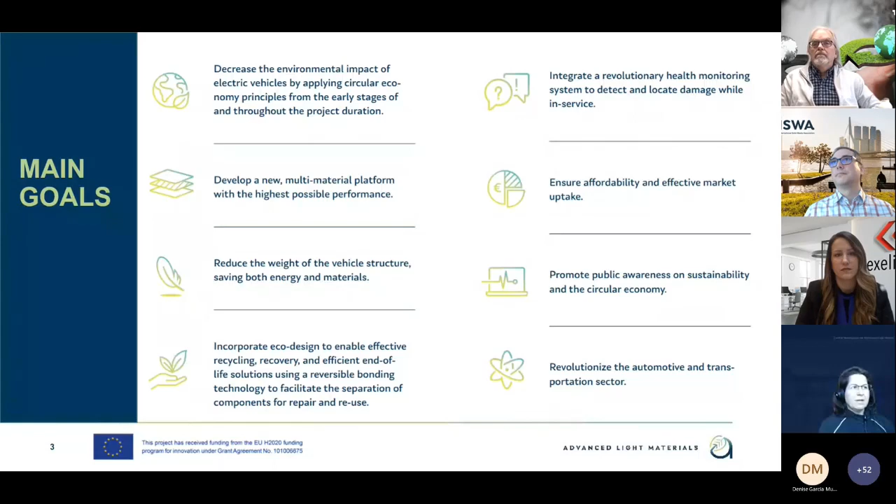As I mentioned before, we are 9 partners composed of 5 industries, some big ones like Ford or ArcelorMittal or BATZ, some SMEs, the case of Rescoll and Innerspec, 3 RTOs, CTAG, Fraunhofer ITWM, and TNO, and 1 international association, ISWA.

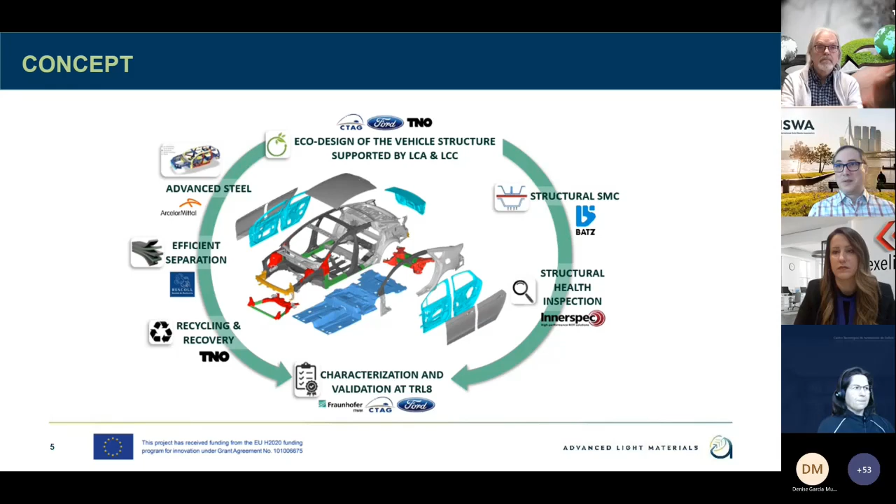First of all, the first step was to adapt the structure of an ICE model, an internal combustion engine model, to a BEV model, a battery electric vehicle model. So this was the first step.

When we had the first version of this electric model, we started the optimization of design. There are several key points we have mentioned here. The first one is that we have to choose the best material for the best location. This is really important because sometimes the materials are really high performant, but we are not putting them in the right way. So it seems very simple, but it's not the case. It's really important to choose the best material for the best location.

The fact of using new high-performance materials allows us to integrate functions. That means that in some cases, at the first point we had 2, 3, 4, or 5 different components, and now we are able to integrate them into one only component. This is thanks to the typology of the materials, but also thanks to the redesign of these parts.

And the last point is really important: when we are designing this new structure, we are not only thinking to meet the requirements for the function of the car or for the life of the car. We are also thinking what is the solution for the end of life. So when we are designing, we are thinking of the use, but also thinking of the future.

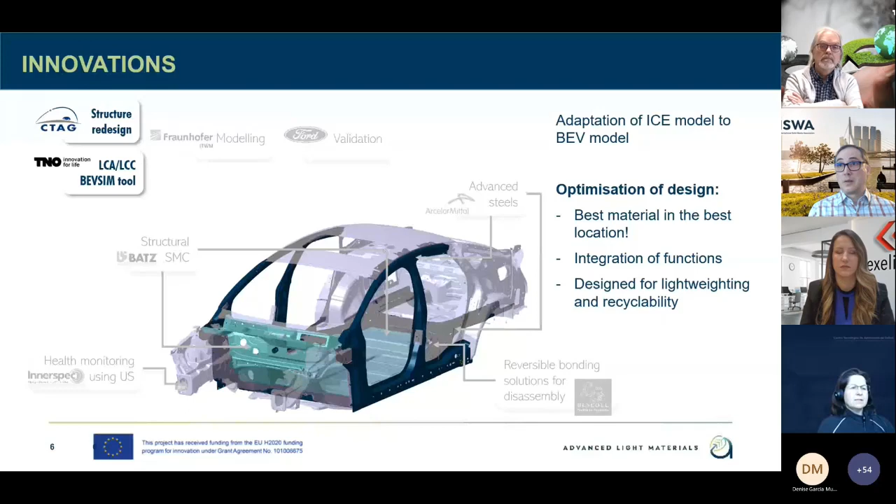Then we pass to the point of innovative materials. In this case, the 2 main partners were ArcelorMittal and BATZ. In the case of ArcelorMittal, they have developed high-performance new steels. We are using these new steels in 165 parts in this new body in white of the ALMA project.

In some cases, as I mentioned before, we are able to integrate functions. This is the case of the H-frame or the door panels, so we are able to integrate 2 or 3 components into one only component.

And we are also using the structural SMC, sheet molding compounds, in this case developed by BATZ. And the use cases we have selected for this are the battery cover and the dash panel.

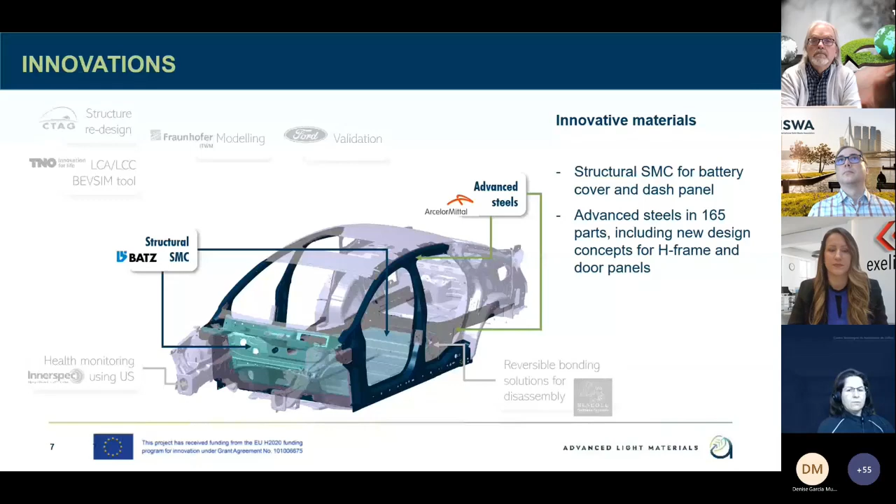So we have a new design, we have new materials. Our partners, Fraunhofer and Ford, entered into action to develop and to characterize, firstly, these new materials. Fraunhofer has developed the new material cards and compiled all the information and required characterization for these new materials. Our colleagues from Ford have carried out all the validation, all the virtual validation, to be sure that this new design with these new materials meets all the requirements in terms of crash - front crash, back crash, lateral crash, etc.

It's clear that at the beginning we found some problems and we had to redesign, but now the results are really good.

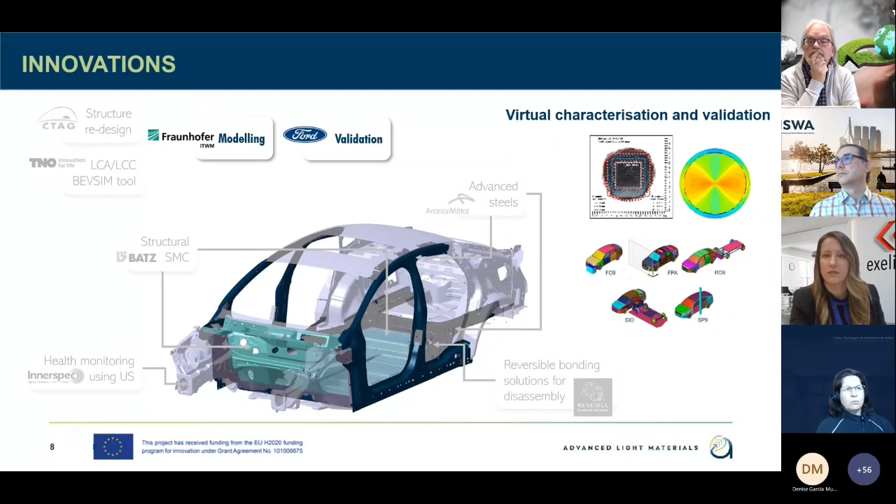So we have the design, we have the materials, but we also have parallel technologies, we can say. This is the case of the debondable adhesive. In this case, it's thinking of the end of life. So we are going to use this adhesive to join hybrid components, one component from steel and another component from SMC. The idea is that at the end of life, by applying high temperature, around 250 degrees more or less, we will be able to separate, to disassemble in an easy way.

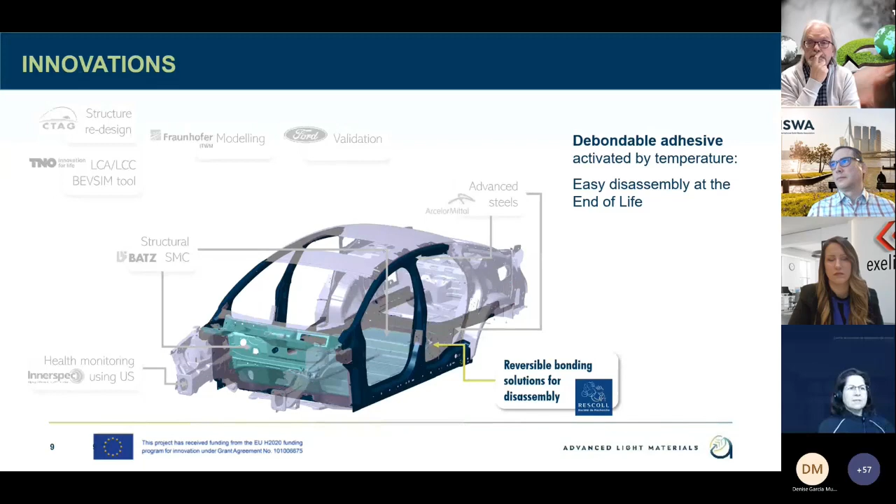And the other innovative technology concerns health monitoring. Our colleagues at Innerspec are developing a technology based on ultrasounds that is able to determine the condition of the part. So we will be able to determine if this part could be reused, or if we have to recycle it, or we can choose what is the function at the end of life.

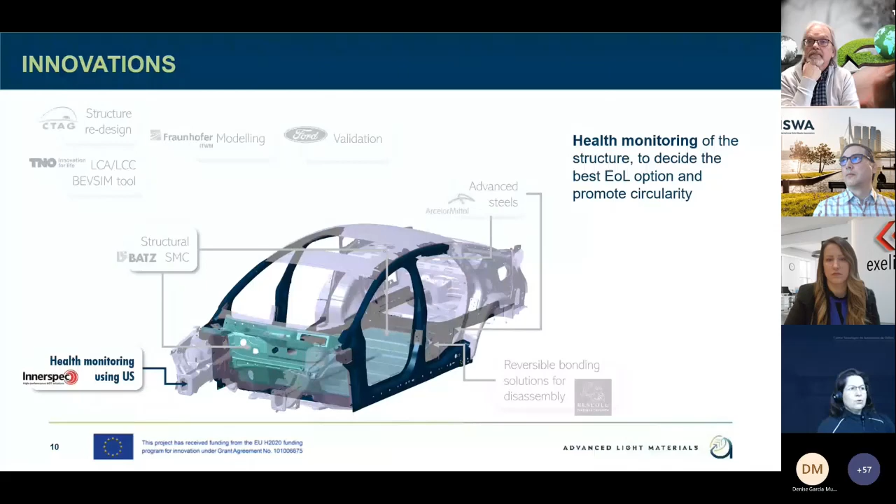So this is in general the whole approach we have in the ALMA project. At this point, with the work we have carried out until now, we can say there are 2 main results. One is the BEVSIM tool, which my colleague Tom will explain in detail.

I think it's really a very useful tool that can help the designers to take into account the LCA and LCC parameters to have a better design of the part. But Tom will explain in 5 minutes. And I think I pass.

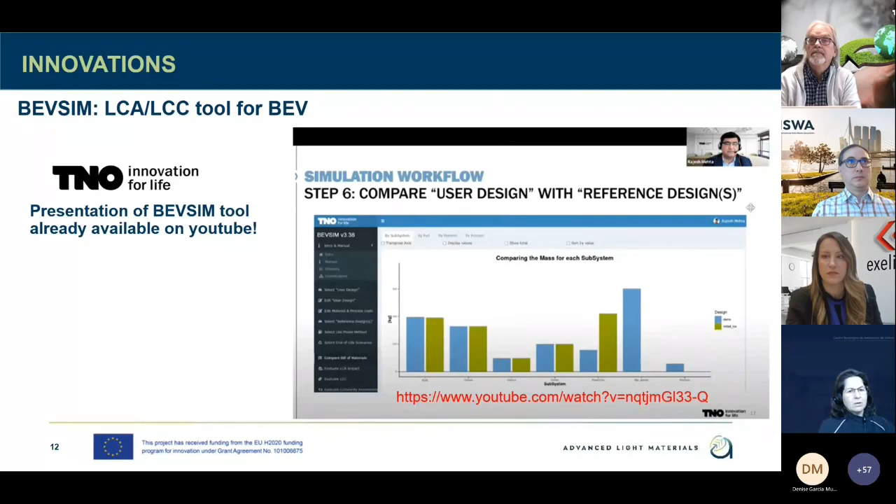Yes, in this point, the other good point is that we have carried out work. We have reached a lightweighting potential of 23% concerning the baseline. So we are really happy about this at this point.

We think the potential impact we can have in future vehicles is really important. So now in this last year of the project, we are focusing on the manufacturing processes. That means we are going to develop some demonstrator parts in steel and in SMC to check the results we have obtained in the virtual validation, and to check the feasibility of the parts with these new materials. But we are really confident that this point is good and has high potential for new vehicles.

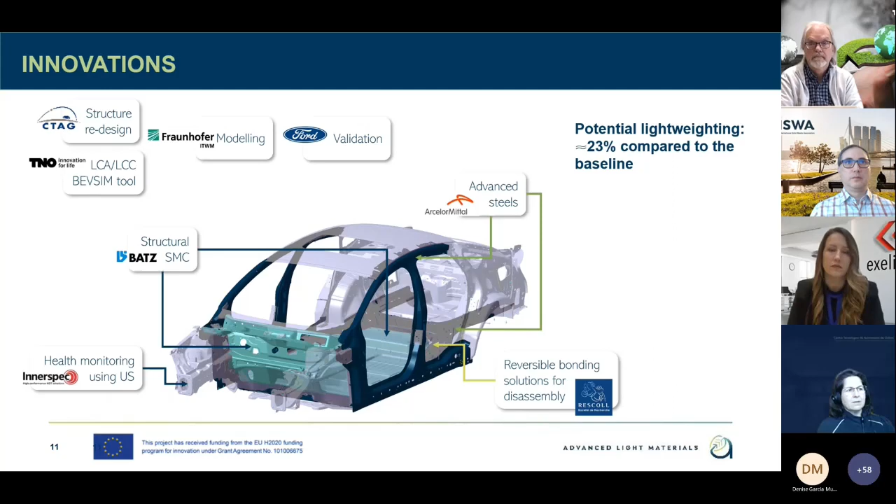So from my part, this is a brief introduction to ALMA. I really want to thank all the consortium partners involved in the EnlightEV consortium, because I think sharing results between different consortiums and different projects is really important. This webinar is one example of this. We have developed some activities during this last year, and we will have more joint activities in the future. If you want to know more about ALMA, please don't hesitate to contact us through social network, our web page, or something else.

I think I have respected my time, my slot, and that's all. Thank you.

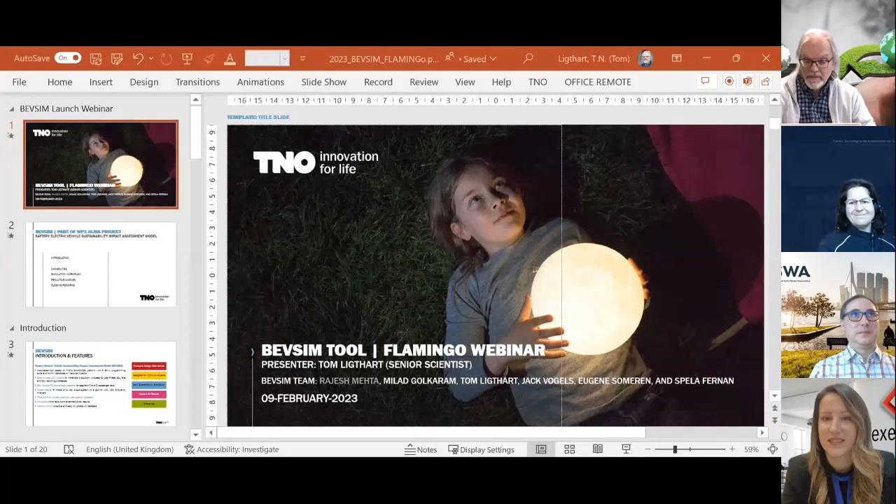So let's see. Is my presentation visible now? I think so, yes it is.

Yeah, okay. The BEVSIM tool is the result of a team at TNO, and of course also input by the partners to fill the database. I will be presenting it today. I'm Tom Ligthart, Senior Scientist from TNO, an RTO from the Netherlands. And I'm going to show you some things about the BEVSIM tool. So first a short introduction, and let's see what the capabilities of the tool are, and the kind of simulation workflow. After showing the results, I'll end with some closing remarks.

BEVSIM looks over the full life cycle of a battery electric vehicle, and BEVSIM stands for Battery Electric Vehicle Sustainability Impact Assessment Model. It's an LCA model, so you can really do an LCA with this tool, as all the materials needed for the production of a car, the processing of the materials into parts, and choices to be made for the use phase, the end-of-life fate, and the end-of-life recycling processes can be made, and we are aiming at the segment C and D passenger cars.

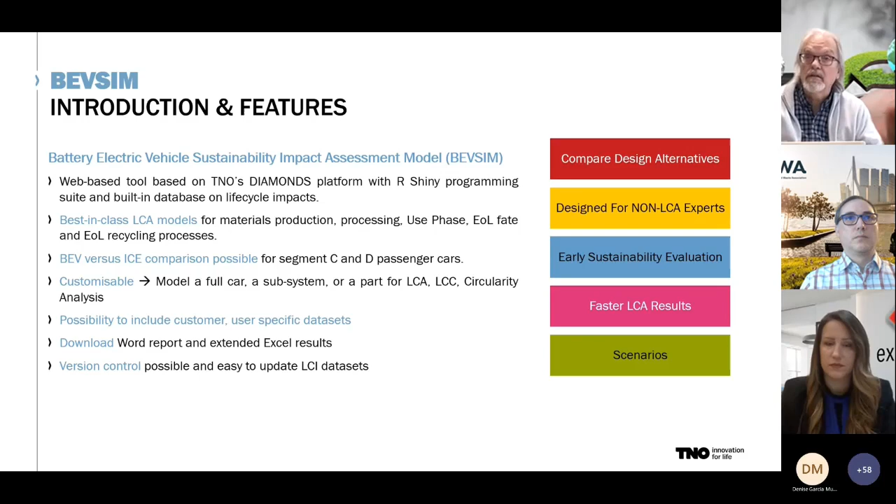So with this tool, you are able to do the full LCA, and really have a fast result, and also people not specialized in LCA can do this. It's designed for non-LCA experts, like the designers of parts, materials, and complete vehicles.

The capabilities of BEVSIM - let me take a pointer. It of course has an LCA part, but also life cycle costing, LCC, and a circularity assessment. Later on, with Ximena of Global Factor, I will present something about circularity in the automotive industry. So you can see what is the impact of lightweighting, the measures that you take, and see what are the effects of material choice, but also, for instance, the use phase.

In which country are you taking your electricity from for charging your car, and are you using gray or green electricity? Also, future recycling scenarios have been included in the end of life, so you can also look at the future end of life performance.

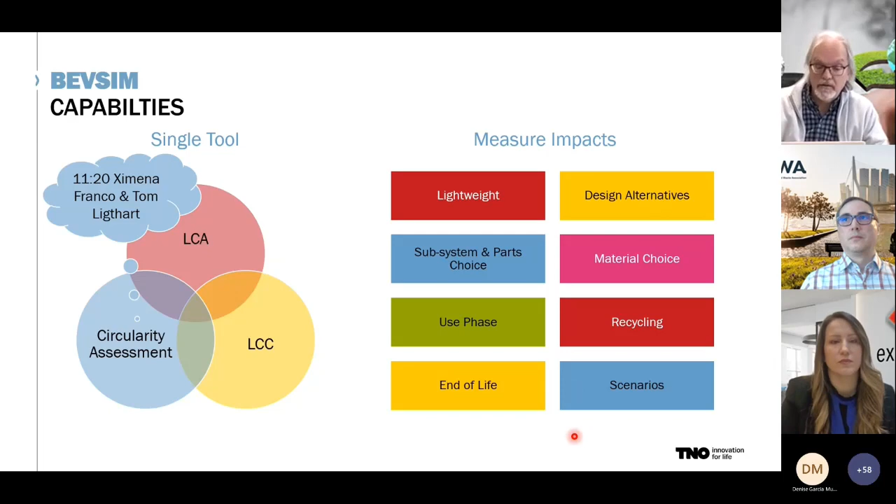All the life cycle phases are included, so the raw materials, all the things you need to make a car, and also the processes to make parts from these materials. Plastics are included with compounding and injection molding, and also metals with stamping, casting, all kinds of processes, plus the painting and assembly of the car.

In the use phase, you can look at the energy consumption of the car, which depends, among others, on the weight of the vehicle, and that's automatically included already. Maintenance is also included, along with changing of parts during the life cycle.

At the end of life, there's the current scenario, but also a future scenario, including recycling and energy recovery that avoids the production of materials and energy. That is also part of this tool.

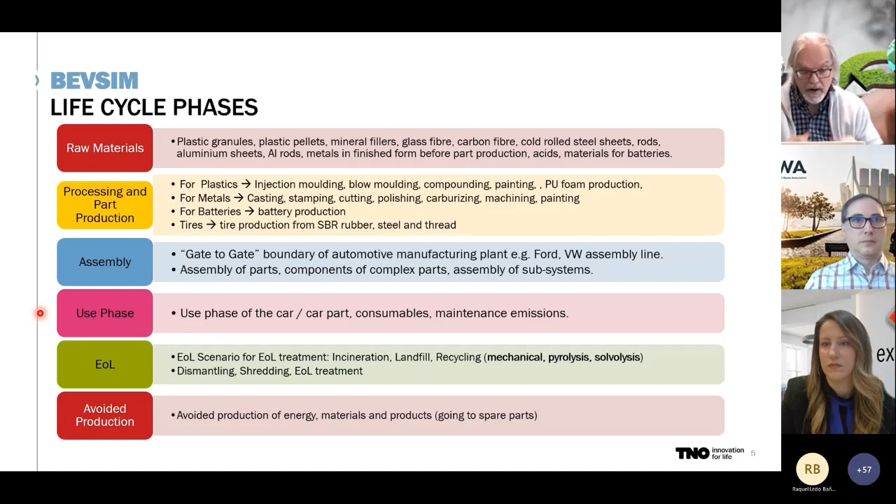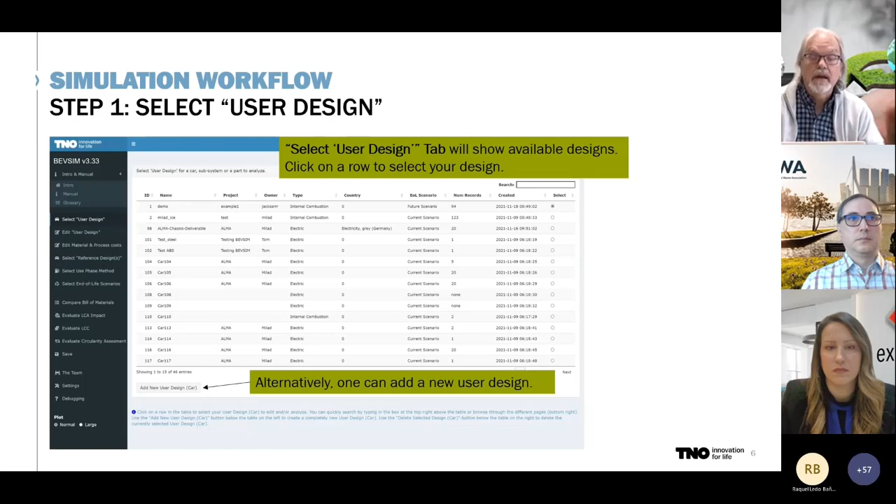You start with BEVSIM by first selecting a user design. There are already some available, and you can select one and then edit this user design. You can also do it at the subsystem level, for instance body-in-white, or even at a part level.

LCC is also part of the tool. There is a database with default material costs, and user costs are included as well, so that's the consumer side. You can edit these prices to suit your own needs.

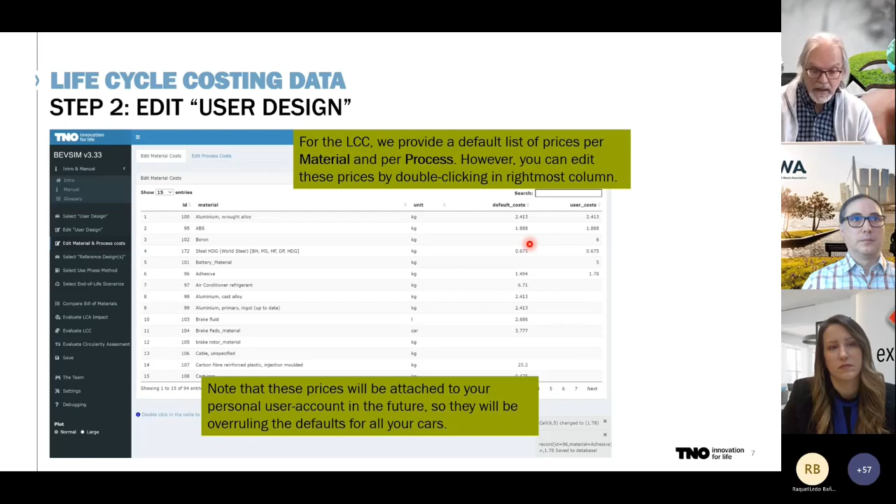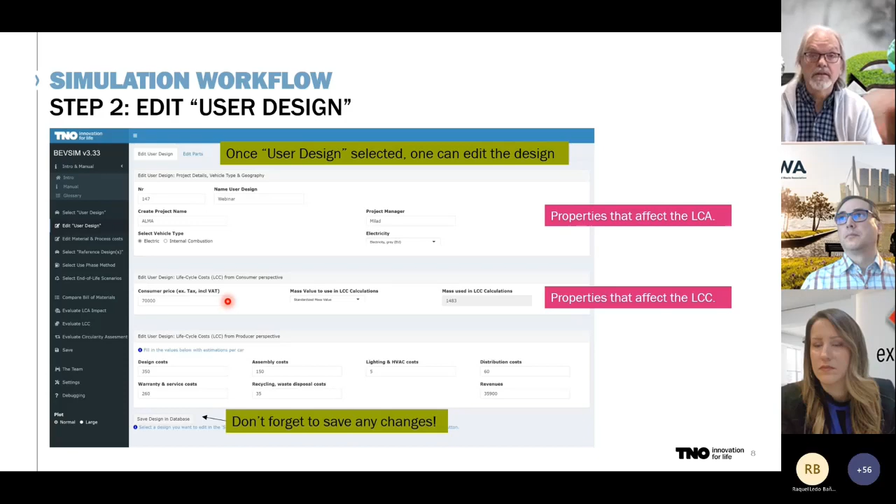In the user design, you can select the type of electricity or fuel in case it's an internal combustion engine, select a consumer price, and other cost elements. That's then all used in both the LCA and the life cycle costing.

You can edit the user design that you've chosen and save it under another name. You can add or delete parts, and with those parts, you can also select and change the materials.

You can select up to 3 different processes to model the material into a part, and their efficiencies are taken into account. You only have to give the amount of material in the actual part, and the tool will calculate the final material needs. It also accounts for recycling and treatment of the production waste, as well as end-of-life waste. That's all included.

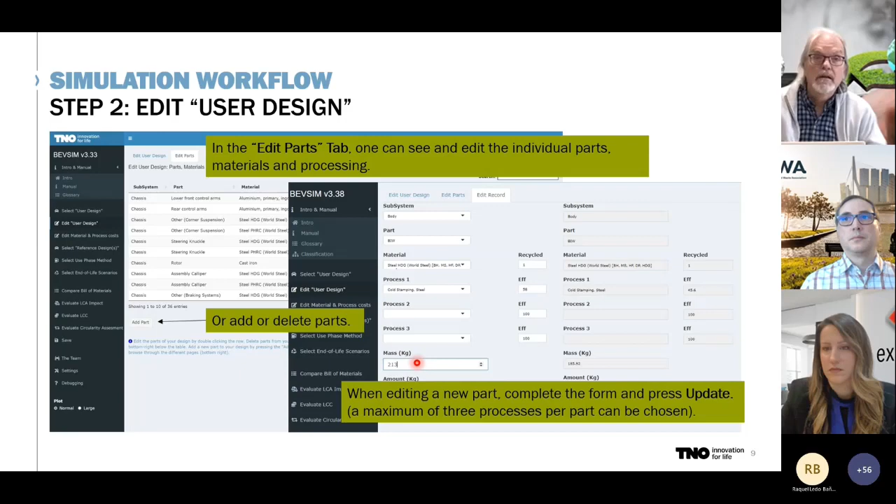Then you select up to 2 different reference designs with which you can compare your own user design.

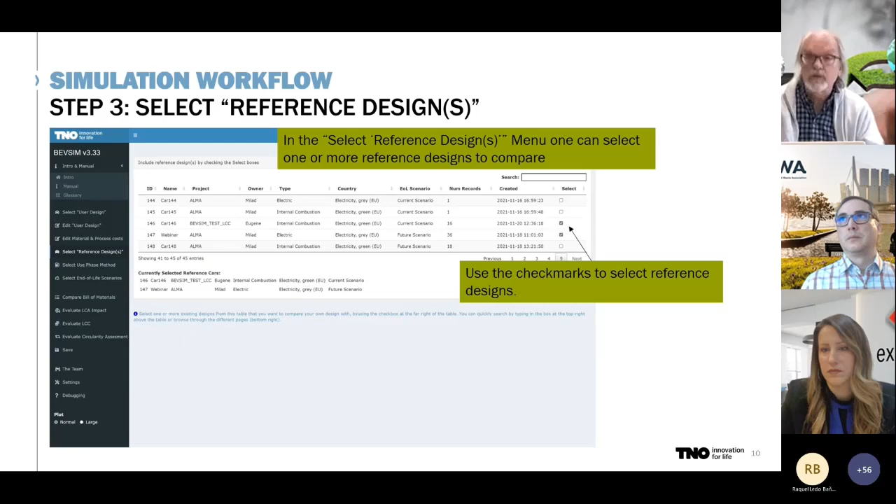You then select the use phase methods. For instance, which country do I take my electricity for the consumer from? Is it gray or green electricity, as that will affect the performance in the use phase.

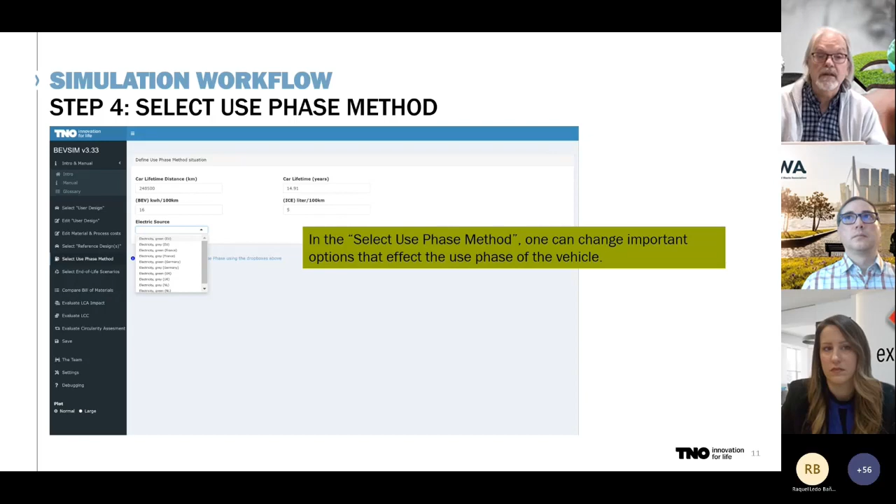The end-of-life scenarios are then selected. There is a current reference scenario, but you can also have future scenarios in which we have chemical recycling for the plastics and the sheet molding compounds, because they can become more and more important in the automotive industry.

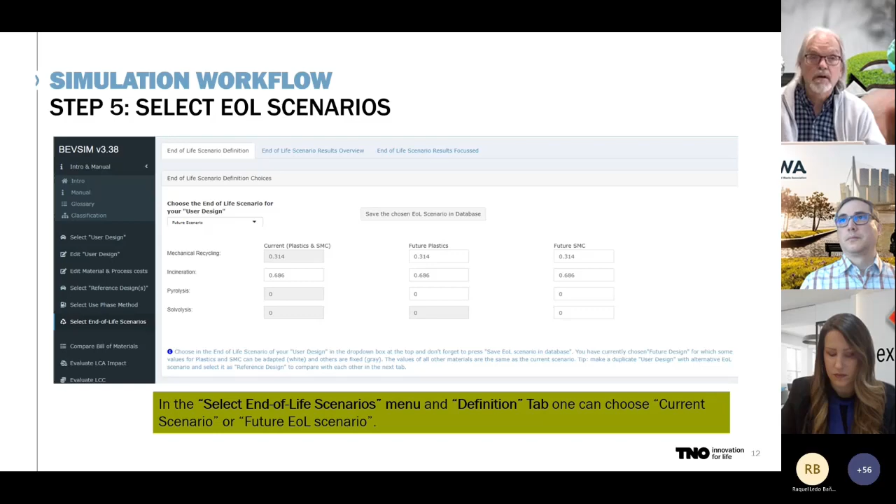Here is a selection, a comparison of two different designs, a battery electric vehicle and an internal combustion petrol car. In this case, the body is the same weight, but the chassis of the battery electric vehicle is heavier, and also in the powertrain, because the battery adds a higher mass. So lightweighting of these electric vehicles is of importance.

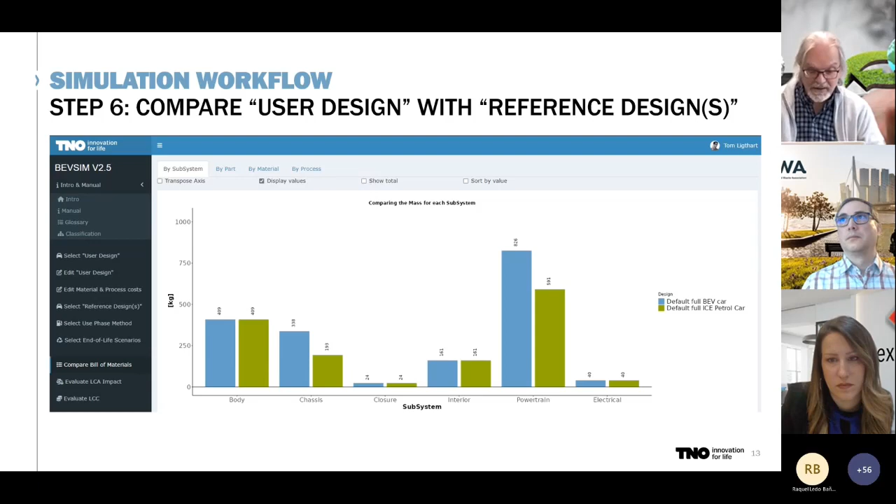That's also a way to look at it and see where my hotspots, my most important impacts, are.

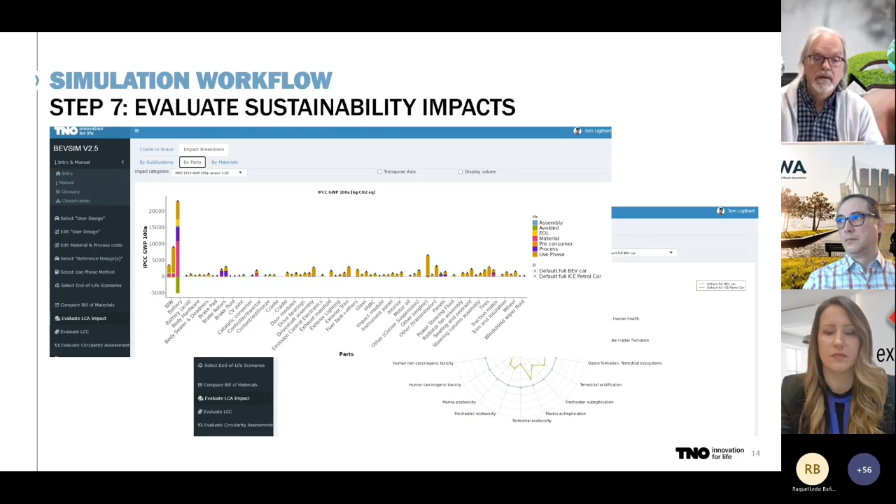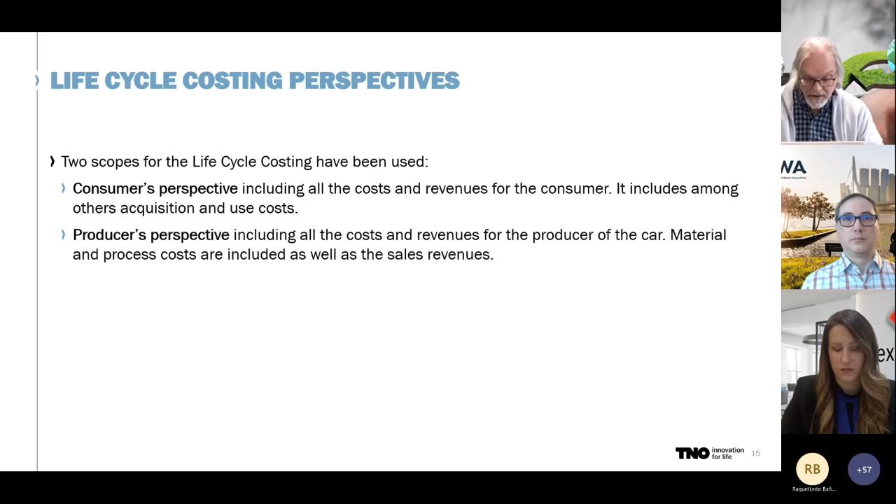For the life cycle costing, we have two perspectives. First, that of the consumer: the price the consumer has to pay for the vehicle, but also other costs like taxes and energy cost, and in the end there might be some revenues for the end-of-life vehicle. Also the producer's perspective, where you see material costs, processing costs, but also costs related to, for instance, callback actions, and of course the revenues. That's also a possibility.

For the consumer, of course, the purchase costs are the most important, but there are also costs from the use phase, which may be taxes as well as energy costs, and there can be some small revenues at the end of life. Then you see the total life cycle costs for the consumer.

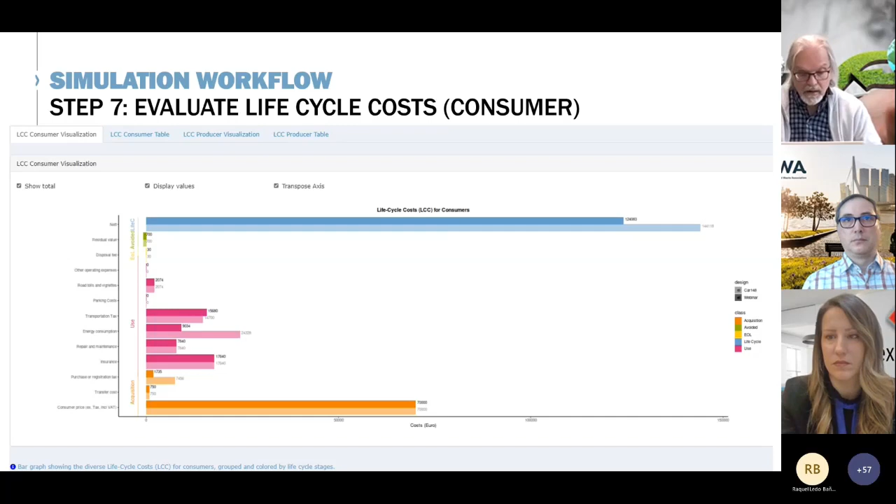So that's also a thing which you can take into account. For the producer, that's again things like the manufacturing costs and other costs, and of course the revenues that come from the sales.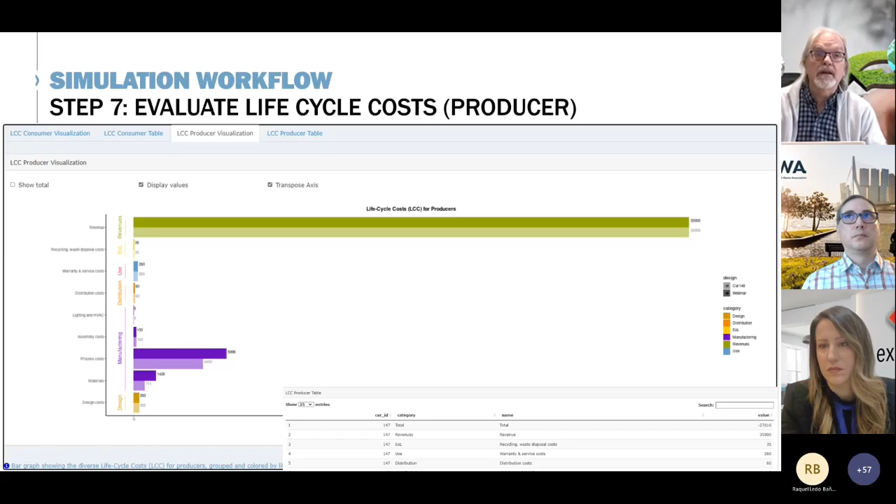Some closing remarks. So it's BEVSIM. It's an online tool with which you can assess the environmental impact via LCA. You can assess the circularity, show more on that later, and also the economic impacts. Also have the consumer perspective, which might be a kind of sales argument if you have better performance there, for instance in the use phase.

It's specifically designed for non-LCA experts in the automotive sector. As said, you can model a whole vehicle, but also parts. And the tool gives consistency over all the LCA studies that you do.

BEVSIM is also accessible for third parties, and we can have a discussion for that on a case-to-case basis, and that can also be a modification of BEVSIM.

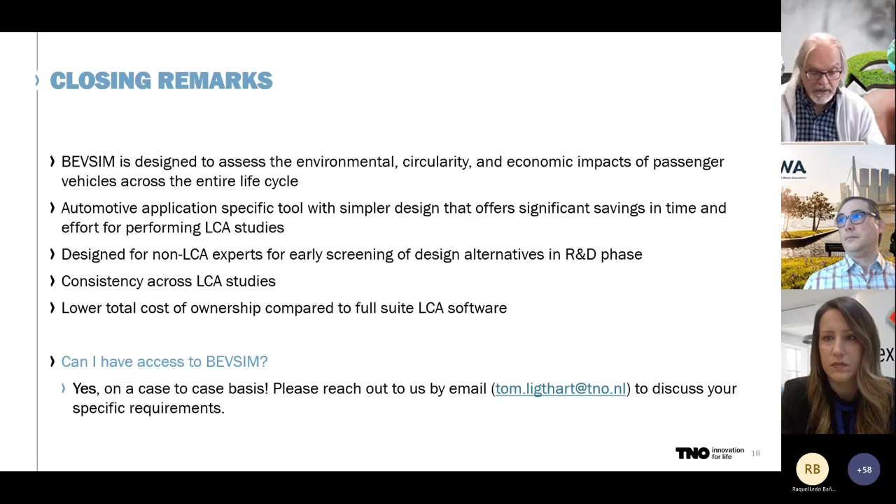Then, so this is the end of my presentation. I'll present you the ALMA team. Originally Rajesh Mehta, but he had to leave TNO, was the work package leader for this. Now I am the leader, and these are the other people that contributed to filling and designing, constructing the BEVSIM tool, and also to get it as an online tool available for others.

As said, we were funded by the Horizon 2020 project, and we had input from our partners in the ALMA project. So as already said, an introduction is also available on YouTube, and of course you can contact me for further details. That's my presentation. So I don't know whether there are questions.